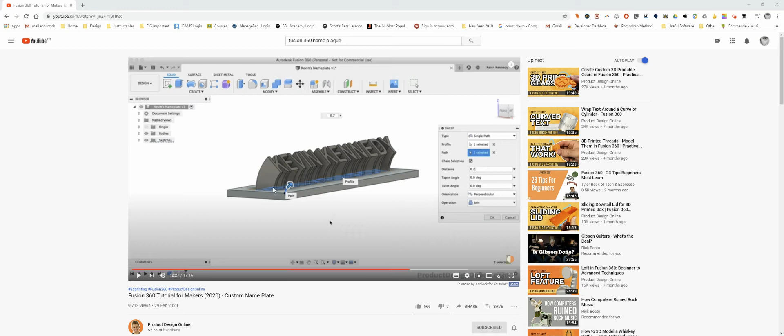Following on from the first two video tutorials I've created for this, I want to look at doing the sweep on the text and also shelling the text, because I want this light to have the text not solid but shelled, so that light from LEDs underneath the 3D print will shine up through the text and it will glow. That's what I'm looking for.

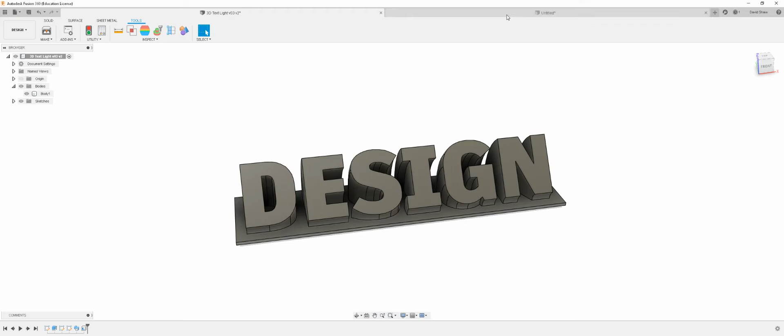So let's have a look. I've got my nameplate, I've got my text on here, everything's been dimension driven to the right size, and I've got this sweep arc on the side here, or sweep profile, should I say. So let's go ahead now and do the sweep.

Or before I do, let's just see what I've got down the bottom here. Let's just look at my history, okay? With my history marker here, I'm going to bring this back to the start where we began. The first thing I did here was create the sketch. Let's make sure that my sketches are all visible. There you go, that helps.

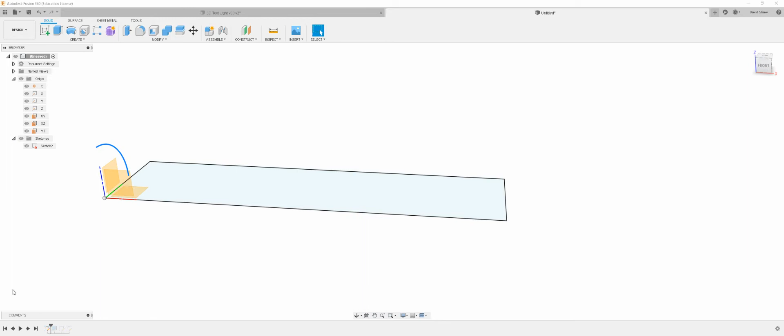I made sure that this sketch had very specific dimensions, and I talked about why I was choosing these dimensions so it would fit on the 3D printer and I could do multiple prints at the same time. Then let's just finish the sketch there.

Then we did an extrusion of this to make sure we have a very thin base. We don't want a big, thick, chunky base, which is what Kevin has. We want a very thin base because we want the light to shine through this, and we're trying to save the amount of filament we're using, because we're going to have an acrylic laser cut base for this, which is going to mount the LED lights. So this doesn't have to be that strong. It just needs to be very subtle and allow plenty of light to come through.

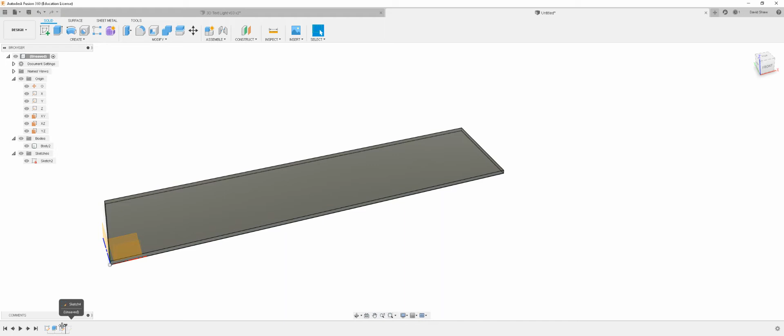Then we have the text going on, which is very carefully scaled so it fits nicely on the base. And then finally, we're going to have this sweep arc profile.

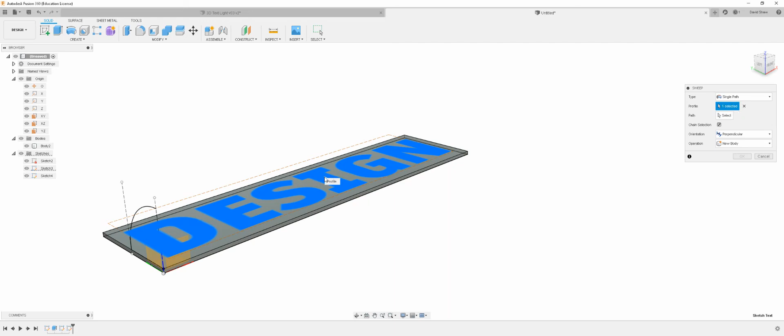Okay, let's go to sweep. Here's my sweep dialog box. It's going to be a single path. And as Kevin says, the profile is going to be the text here, and the path is going to be the path that we created there. This brings the text all the way up so it is vertical, which looks really cool.

But unfortunately, we won't be able to do this on a 3D printer. Now, Kevin talks about this with a little bit of detail. In fact, something just happened that I'm going to show you, which I really enjoy.

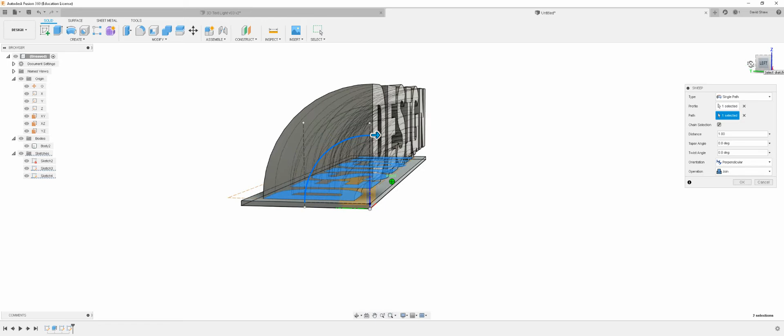Can you see that when I'm viewing it in 3D, we have the full 3D perspective? You can see the text here looks like it's going to a vanishing point somewhere over here, so it's fully 3D. But when I click on this left work plane, it suddenly snaps into an orthographic view, so everything is flat on. I can also see loads of lines in here as well.

So let's just see what's happening here at this point. First of all, let's go to display settings. I've got to think where it is now - is it visual style? Oh my goodness, I should have made some notes about this first, shouldn't I? Oh, there we are, camera, that sort of one.

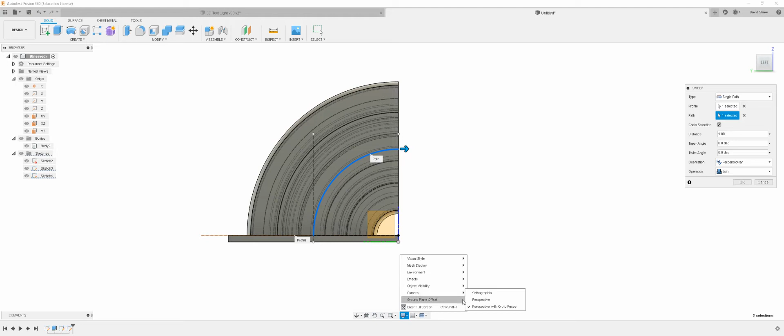If I go with perspective all the time, then you can see, even with this left view shown, I can see the depth of the object. I can see the design going to - basically this is a 1-point perspective. Let's just zoom into it. It really is 1-point perspective, so the vanishing point is right in the middle of this shape. Everything in this drawing is leading back to a vanishing point somewhere back here. If you draw these perspective lines back, you go to a vanishing point.

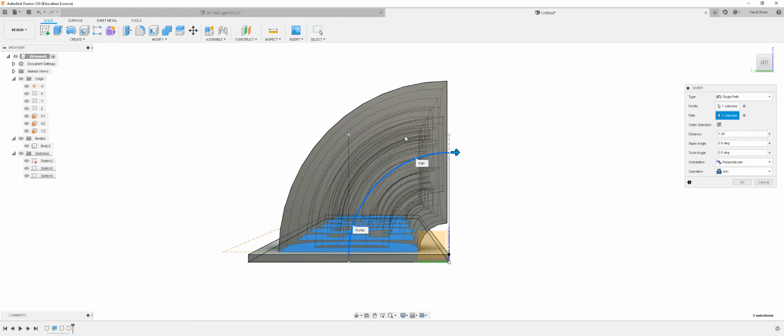And of course, if I rotate this into 3D, we still get my perspective effects. Let's instead go to the orthographic view, and this means that if I view this from the left work plane, it's represented as a flat 2D profile, which simplifies my drawing experience. But if I just bring this into 3D, now it looks really distorted, because the height of the D at the front is the same as the height of the N at the back, but our brain is telling us that in 3D things get smaller as they move away from us.

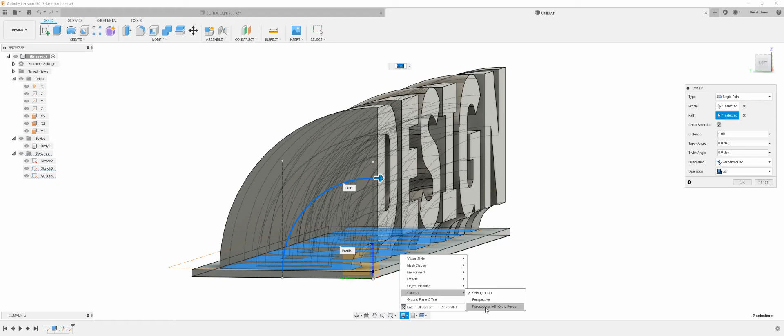What I like to work with in the camera model here is perspective with orthogonal faces, which means that in all of my 3D views, it's representing this as a 3D effect with perspective. But if I view this from a work plane, we have got it as an orthogonal view, everything flat on. So now I can see this as a flat face to edit.

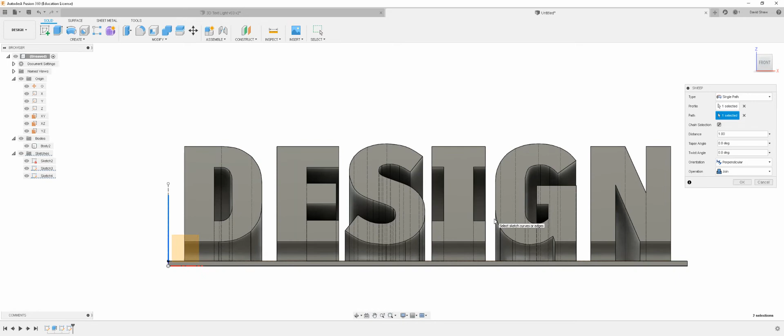Okay, right, so enough about that. Oh, what else did I want to show here? I've also got all these lines in here. Let's just see what's happening here.

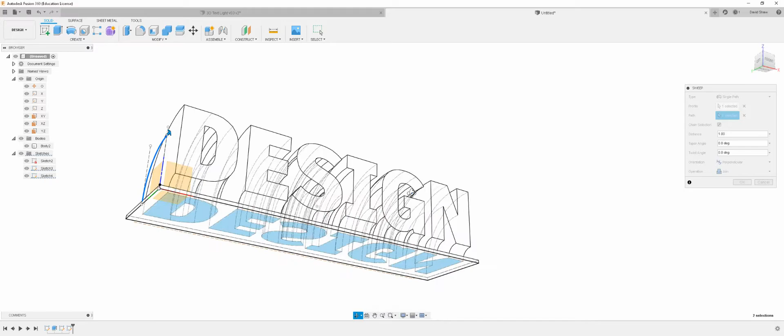If I go to visual style, at the moment I've got shaded with hidden edges. If I go to wireframe with hidden edges, then you can really see what's happening. It's showing all of the profiles of these 3D extruded shapes, and if it's visible it's solid, and if it's hidden it's dotted, which looks really cool, but gets a little confusing if I'm viewing this as an orthogonal sketch profile from one of these work faces.

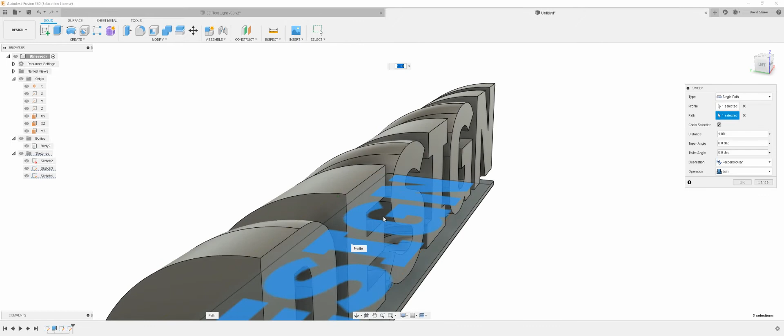So let's go to visual style, let's go to shaded, and I like to go with visible edges only, and then it really highlights these edges. You're welcome to explore some of those other settings.

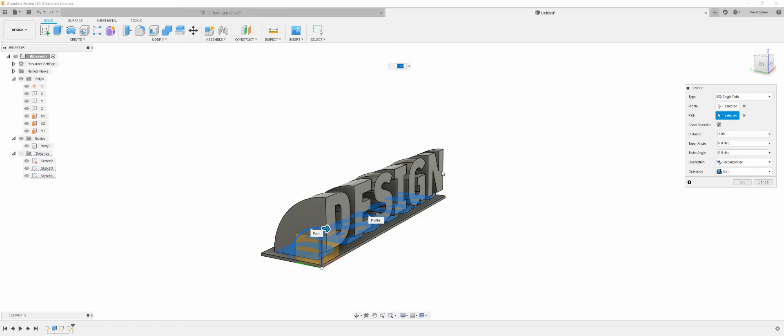Notice as well, I can still see the sketches through my drawings here. What I might want to do is turn off the sketch view, and now I can just see. Interestingly, I can still see the text there. Oh, I know why—I can still see the text because I'm using the text as part of this sweep command. Okay, now back to our main point here.

Kevin was saying that you need to be aware of the properties of the 3D printer in terms of support material when you're building. If I have a look at this, the problem is occurring right here where my mouse is moving, because as this is building out, the 3D printer is basically extruding all of this filament, and as it builds out roughly from this point onwards, we have this overhang, and this overhang is working towards a horizontal overhang.

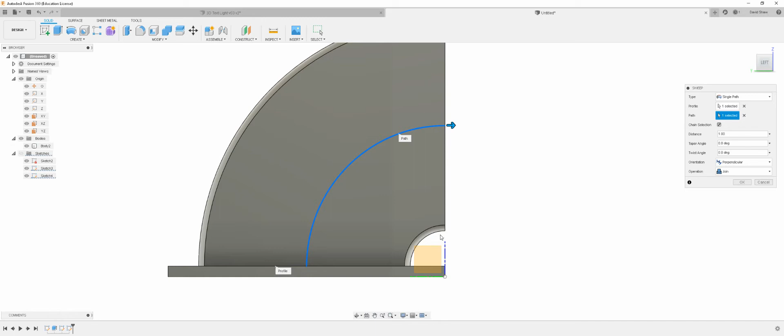Any filament extruded out of the print head at this point is just going to drop away, fall away, unless there's some scaffolding, some support material placed in here, and that's not very good. It's okay at this point though, because technically we could remove this support material, even though it would give a bit of a poor finish.

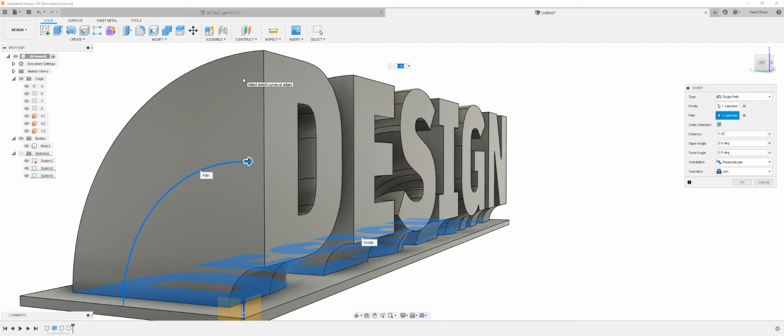But it's more of an issue up here inside the model, because if this is going to be a shelled piece of text, then up inside this model there's going to be support material appearing in here. Trying to dig that support material out when it's inside the text is going to be pretty much impossible. So what we cannot do is build this with support material. But if we build it without support material, the whole thing's going to collapse if we're working with a standard fused deposition modeling 3D printer, which is what the Zortrax printer is.

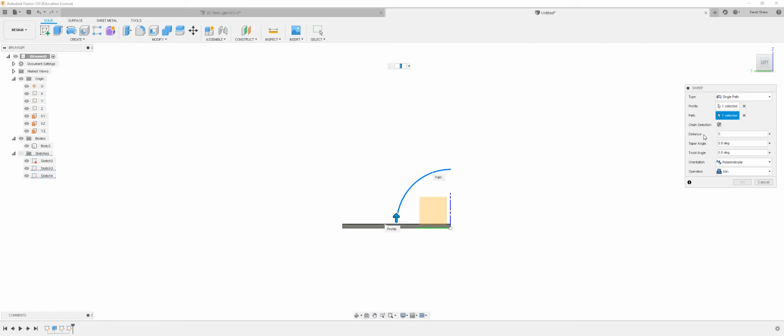So the solution is I'm going to come to this distance command, and I'm going to put that to 50%. Now, before I dial it in, remember that 100%, or one whole, was a 90 degree sweep. So if I put it to half a sweep, or 50%, then logically you realize it's going to go to 45 degrees. Let's put this to 0.5, and I've now got a 45 degree sweep.

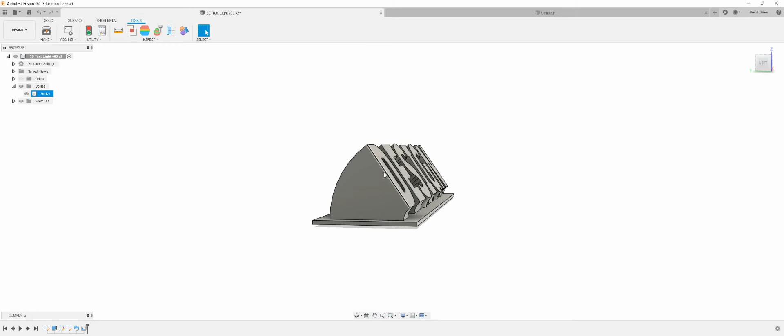Now this is going to be perfectly acceptable. That will print nicely, but you might think that the text isn't quite sticking up enough. Let's see what I've got here. Here I've got the text sticking up more, okay? I think I've got this to maybe 66 or 70 degrees profile. Well, what I'm going to do now is do a little bit of maths, okay?

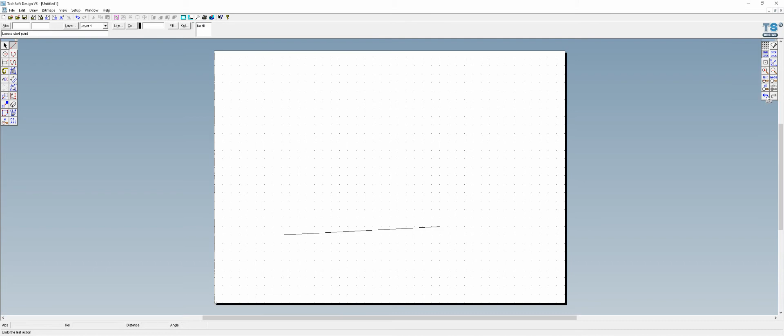What I need to make sure here is that in this extrusion, let's bring in 2D design. I'm going to take this line, come to transform, rotate it, and repeat it in increments of 10 degrees, a total of 9 times around that point. Okay, there we are. So now we've got our increments of 10 degrees.

Let's just confirm that is the case. I'm going to come to my dimension line tools and put in angular dimensions. Let's have a look. That command there, let's bring that back. That's 10 degrees. This one here is 20 degrees. This one here is 30, and so on and so forth. You get the idea.

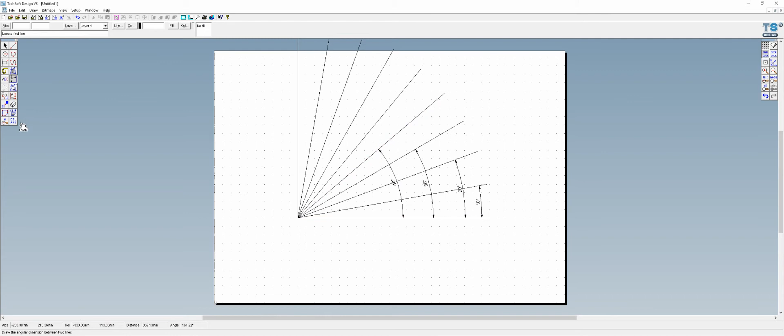In fact, I'm probably just going to delete those back now because I don't need those. Okay, actually, no, I will keep them. I'm going to take them all the way to there. Let's just dial in these values as well. Have I got enough space? Just about.

Okay, and I'm going to add in that line. I'm going to add in a line. Yes, I'm going to add a line there. Oh, that's genius. You'll see why in a second.

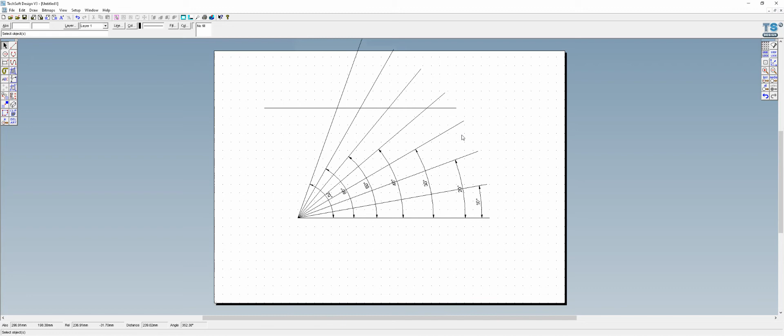Okay, right. So the key thing here is that when we're 3D printing, anything that is below this line, in terms of a build out here, is going to collapse. As we're building out a design, let's zoom in on this, and imagine that we're building something out. So the 3D printer is going to be building along, and up, and along. At this point it's going to be perfectly happy to build like this, even though we've got these kind of step outs here. It's not so extreme that it's going to collapse.

But if I start to build here and build along to here, following this 20-degree line, that will collapse. Basically what we're saying is that the length of that distance there is okay. It says 13, ignore that value, but that is too extreme, and the filament will basically collapse away.

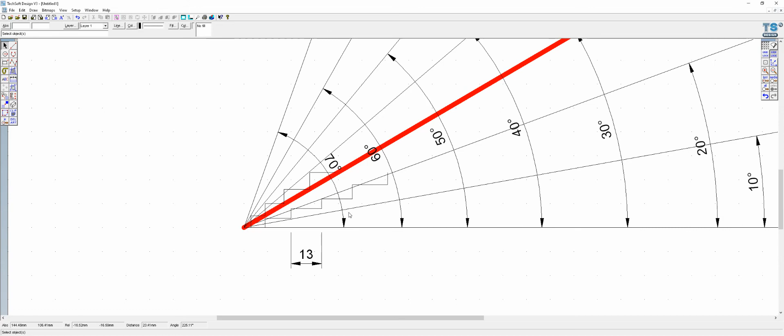But anything that's beyond this 60-degree measurement, let's come to properties, and I'm going to really make sure that that line there stands out, and that text is bold. Let's just do that there. That is the magic there. That is the point at which, above this angle, we're going to print successfully.

So you might think to yourself, well, any height above this is going to be fine. Let's look at this from a different perspective. I'm going to put a line here - I did that line wrong, let me put a line here. Okay, that's the line that I want. Is that right? Come on, brain, work. No, I was right the first time.

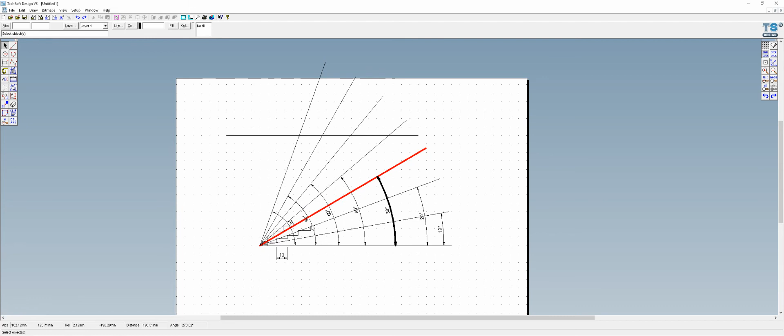Let's just see what's going to happen as I extend this up, okay? I've said it's 30 degrees here, same applies for the text as it's coming up. Basically, 90 minus 30 is, of course, 60. Here's our 60-degree line. I'm going to suggest that this line is the maximum height, or the maximum angle, we can extend the text to.

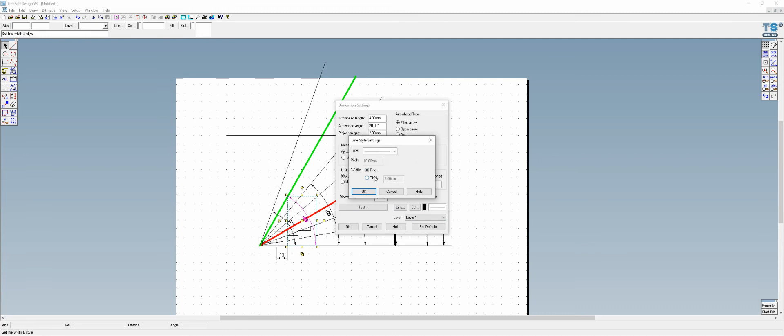Let's make that a different color, let's have that green there, okay, and that's going to be this 60 degrees. Let's bring that to the front, and let's make sure that's a nice thick line too, also green. Let's make that text bold. Okay, there's another - oh, and green is disgusting, I can't see the text at all there, but there you go. Why did I change that? That was a ridiculous thing to do.

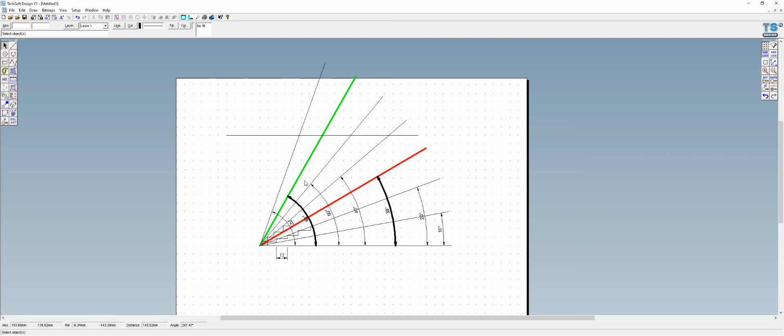Okay, but this green line here is really the height we can go, and it's all to do with what's happening here with the overhang. In fact, let's just bring in a circle here, and let's do an overhang like this.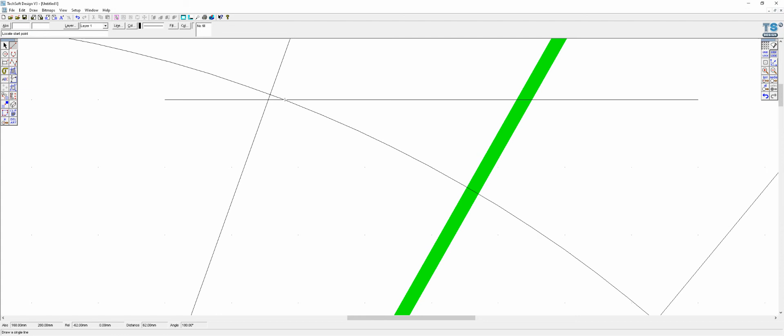As soon as we get an overhang here, can I get a dimension here? I don't think this is going to work. If I try and get a dimension between there and there, no, that's not going to work. But I can come into this and try to pick up the intersect. There are ways I can do this, but I'm not going to worry about it. Let's pick up that intersect and try to get that dimension there.

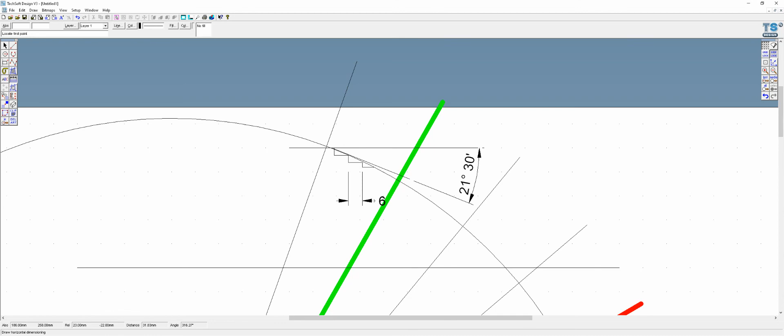This is coming in at 21 degrees, and that is less than 30 degrees. So that basically means that here, again, within the 3D print, we're going to be getting support material required as this builds out like this. And again, this value here from that point to that point is going to be too long for it to go. I had that down as 13, I've got that down as 6, but believe me, it's too long.

So all of that to basically explain here that when we bring this text up, I'm going to close calculator. I don't want that. Let's just come back to this sweep. I'm going to right click on it, and edit the feature. When I'm building this up, I need to control this angle.

In fact, I do want calculator, because using calculator, what I'm now going to do is work out how this 0.5 affects the angle. Okay, so maths, I love it. In calculator here, I'm going to take 90 and multiply that by a half. And we know that if I put it to a half, it's going to be 45 degrees.

Now, what happens if I want to put it to 60 degrees? Okay, well, let's have a see. If I put 90 here, and multiply that by 0.6, let's try that, because you think 60 degrees, that should be 0.6, but no, it's not, because it's not 100 multiplied by 0.6, it's 90 multiplied by 0.6, so that'll be 54 degrees.

Okay, so let's think about this. 60 is 2/3 of 90, so if I do 90 multiplied by 0.66666666 recurring, then that gives me 59.999999994. So that's almost there. Okay, well, I'm going to try something else here.

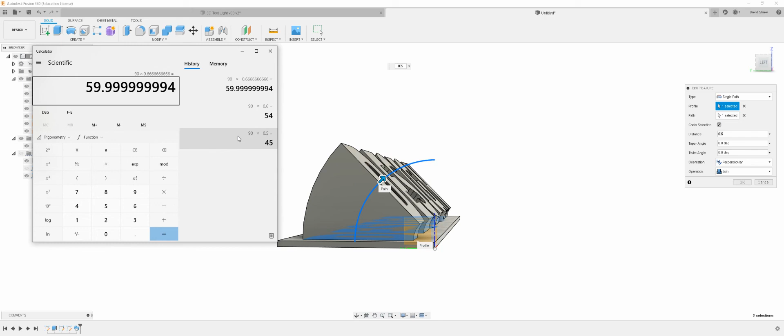How about I do 90, and I want 2/3 of 90. So therefore, I'm going to divide it by 3, gives me 30, and then multiply that by 2. Now that gives me 60. Okay, now how about in here? I could put 0.66666. I could do that. That would be 60 degrees.

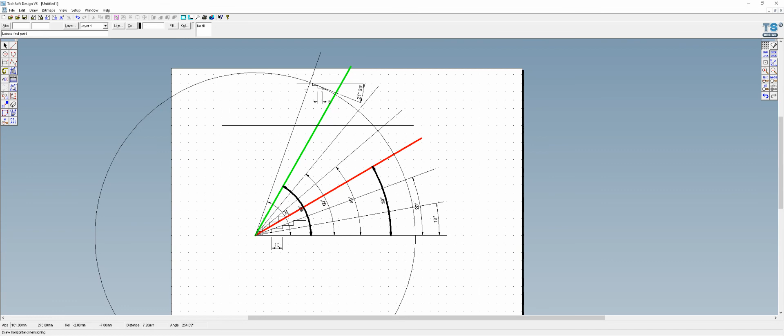And we know from my calculations here that 60 degrees to the vertical there, no, that will be fine. Okay, my tangent there, in fact, look, I did the tangent at 70. At 60 degrees, that would be absolutely fine. In fact, let's just prove that right now.

Let's come into here. I was struggling here, wasn't I? Let's try and do a tangent at that point. I wonder here, can I actually do, let's see, can I do a tangent? Let's come to here. Can I do a tangent from a line? Okay, let's do this. What's it asking me to do?

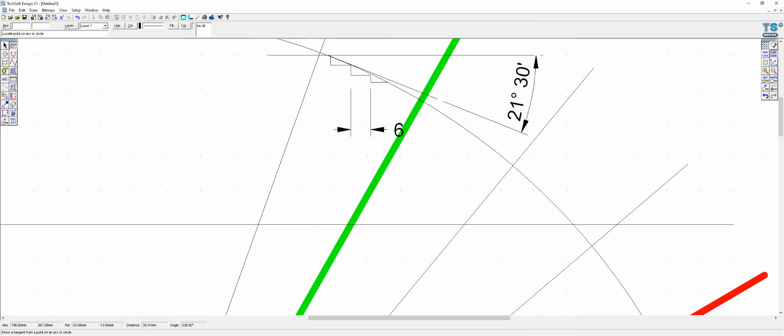Locate point on arc or circle. Okay, so is it going to be there? Yeah, look at that. That's amazing. Oh, and has that worked? Oh my goodness. Let's see.

Let's go to the angular dimension. Let's take this back to here. Is that going to be 30? Okay, it's actually slightly off. It's because I just misclicked there, but that's pretty cool. I like that.

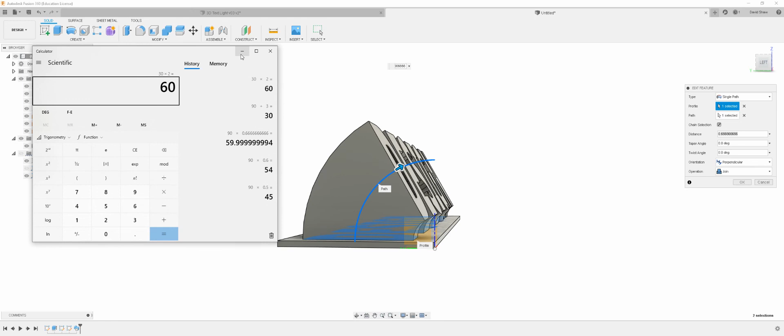So we know that 60 degrees is going to be fine, but I know that this is slightly off. I know that this, remember, gave me 59 point something or other. How about instead I replace that with

2/3? Does that work? So I can use fractions to define distances in Fusion 360. I didn't know you could do that. That's so cool. Okay, that looks absolutely awesome. Let's just confirm that there, and there's my text looking really cool.

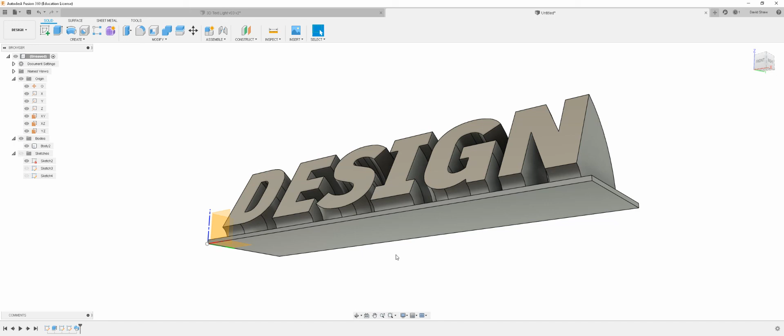Okay, now this has been an epically long video, but I'm just going to conclude this now because we're almost there. I'm going to do 2 final things. No, I won't. I'll stop, and I will do one more video. It's going to be better. Let's stop there.